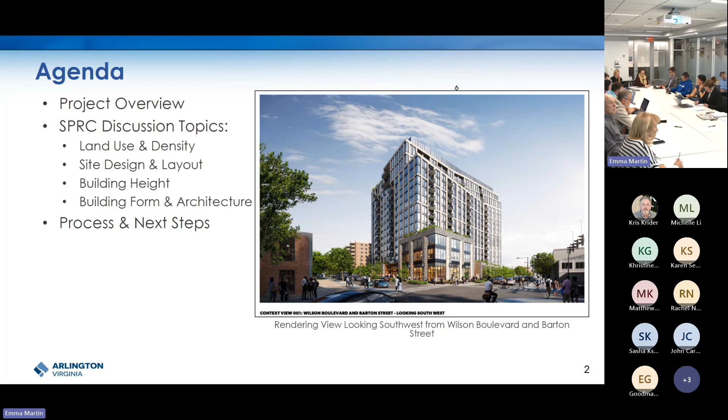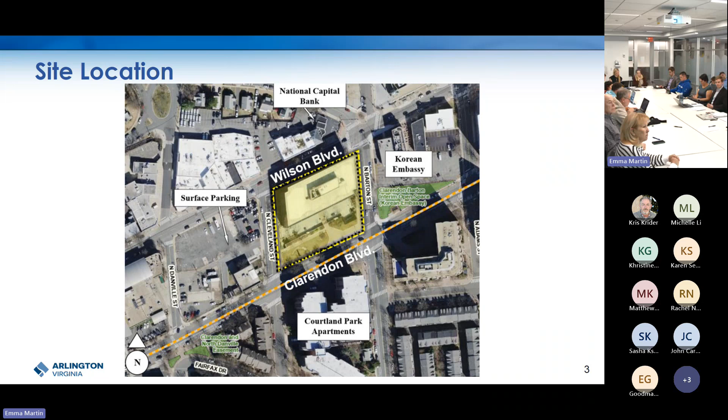The 1.42 acre site is located at 2500 Wilson Boulevard in the Clarendon Courthouse neighborhood. For context, in 1984, site plan number 220 was approved for a 5-story office building with ground floor commercial retail space, which is the building that exists today. The site is bordered by Wilson Boulevard to the north, North Barton Street to the east, Clarendon Boulevard to the south, and North Cleveland Street to the west. To the north, commercial uses are located along Wilson Boulevard, and single-family residential uses are behind in the Lyon Village neighborhood. The existing zoning is CO 1.5 mixed use with a low office apartment hotel GLUP designation.

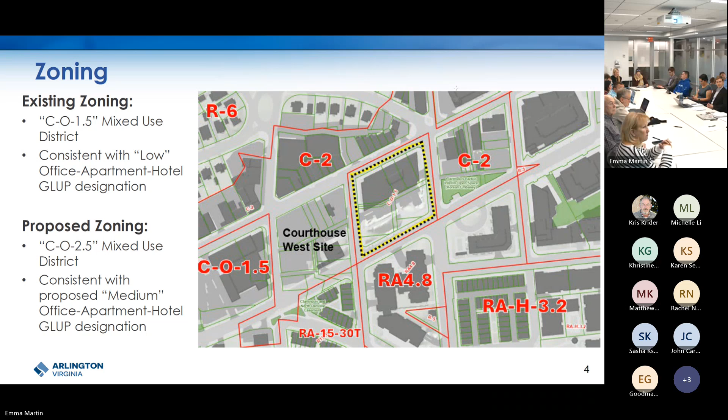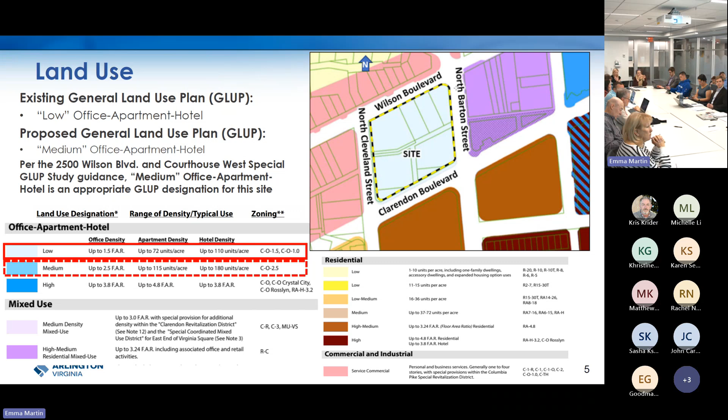The applicant is seeking a rezoning to the CO 2.5 mixed use zoning district. The site is currently designated low office apartment hotel. Concurrent with this major site plan amendment, the applicant is requesting a GLUP amendment to change the site to medium office apartment hotel, which would support the requested zoning district of CO 2.5. Per the applicable GLUP guidance for the site, medium office apartment hotel could be an appropriate GLUP designation for this site.

While there's little specific guidance in the Courthouse Sector Plan for this site, the Courthouse Sector Plan addendum calls for higher density commercial residential mixed use for this area, but does not specify a particular GLUP or zoning designation. On the subject site, the addendum's urban design analysis identifies a sculpture or other feature, and the sector plan's concept plan identifies open space, plaza, and enhanced landscaping on the southern portion of the site.

General guidance in the illustrative plan and design guidelines chapter of the Courthouse Sector Plan includes creating sensitive transitions, breaking up the building mass using setbacks and variable roof heights, differentiating between the pedestrian ground level and upper floors, and supporting the pedestrian environment, as well as breaking up horizontal facades.

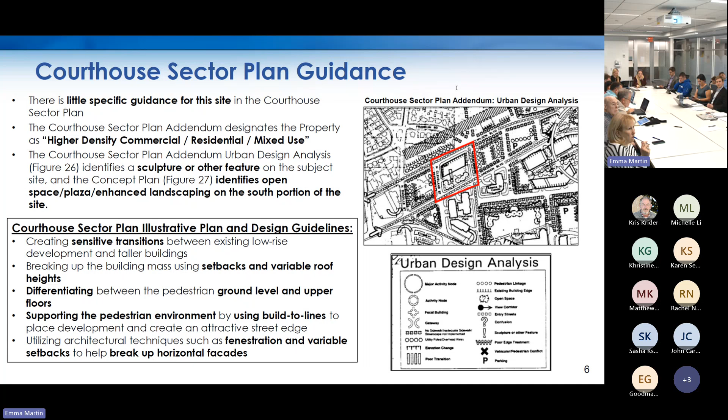In June 2022, TMG 2500 Wilson Boulevard LLC applied for a GLUP amendment to change the GLUP designation from low office apartment hotel to medium office apartment hotel, with an associated rezoning to CO-2.5.

As the site in question has little specific guidance in the Courthouse Sector Plan, staff initiated a special GLUP study, which evaluates the appropriateness of the requested GLUP amendment and provides additional guidance for potential future redevelopment.

For this GLUP study, an interdepartmental staff team initiated a public review process in conjunction with the Long Range Planning Committee of the Planning Commission, which consisted of representatives from the Clarendon Courthouse Civic Association, Lyon Village Civic Association, as well as the Park and Recreation Commission.

Community input gathered throughout the public review process, which included one LRPC meeting, informed the 2500 Wilson special GLUP study document. The study document summarizes staff's analysis and recommendations for potential future redevelopment.

The consensus was that, given the guidance for the site outlined in the recently completed Courthouse West special GLUP study document, there was no need to complete a Tier 2 review, and that the Courthouse West study document can further inform analysis of the 2500 Wilson block.

In May 2023, the 2500 Wilson GLUP study was accepted by the County Board, along with the adoption of an RTA to future public hearings to consider a GLUP amendment from low to medium office apartment hotel.

The 2500 Wilson special GLUP study document summarizes staff's analysis and outlines recommendations for building design, including guidance on setbacks, height, and tapering based on the Courthouse West special GLUP study guidance.

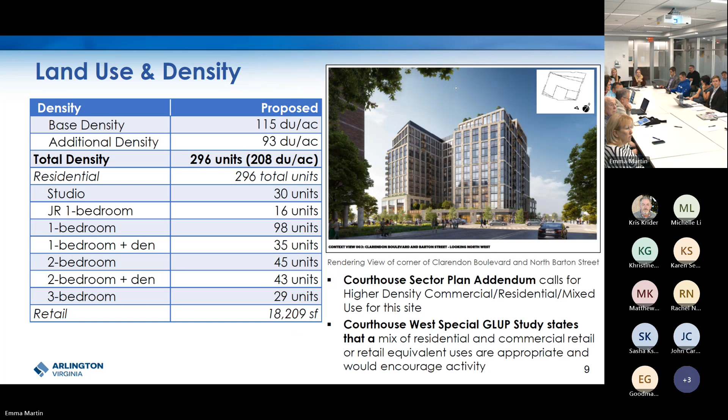In terms of site design and layout, the mixed-use building is 14 stories with ground floor residential and retail, which is in conformance with the Courthouse West special GLUP study guidance to activate the ground floor.

The retail areas will have entries along Wilson Boulevard and Clarendon Boulevard, while the main residential lobby entrance will front on North Barton Street. Above the one-story podium, the applicant proposes a courtyard and amenities for the building's residents. Additionally, the building is topped with a private rooftop amenity space.

The below-grade parking garage and the location of access to parking off North Cleveland Street is in conformance with the GLUP study's recommendation. For purposes of tonight's discussion, we can talk about the building and open space at a conceptual level in terms of placement and layout.

As the applicant progresses on the design of these spaces, we can go into specifics at the next SPRC meeting, which will cover transportation, public art, and open space.

In conformance with the sector plan and GLUP study guidance, the applicant is proposing approximately 6,700 square feet of open space on the southern portion of the site, which will include pavers, planters, seating, and new trees along the sidewalk.

The applicant's submitted plans do show outdoor dining. However, that's a separate process from this site plan and not a part of this site plan proposal. The applicant is aware that the streetscape and park frontages should be designed to support a variety of uses, not just restaurants.

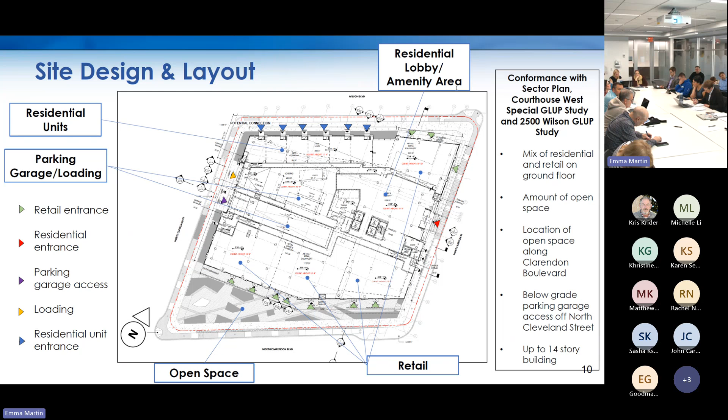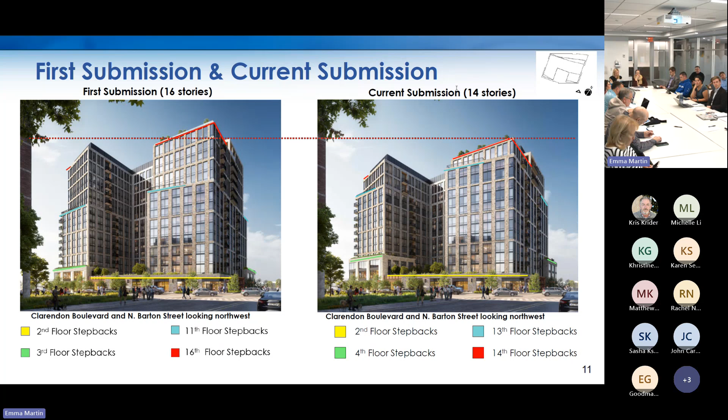The applicant's original request was a 16-story building with over 320 units. On February 19th, the applicant submitted a revised application to change the building height to 14 stories, which conforms with the recommended maximum height outlined in the two applicable GLUP studies guidance.

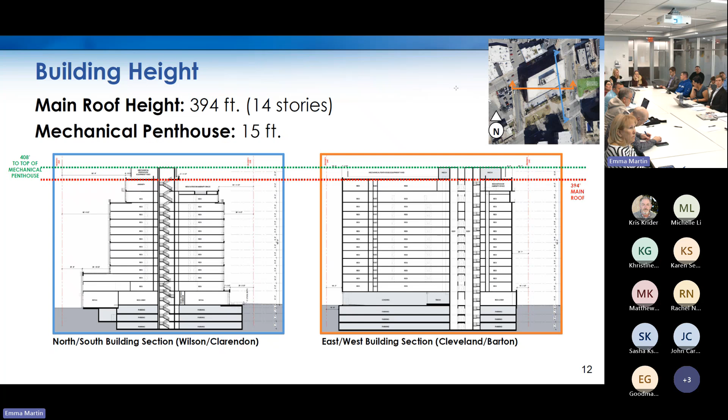The proposed building height from average site elevation is 394 feet and 408 feet, including the 15-foot mechanical penthouse. So the building will have a height of up to 171.5 feet at its highest point from the ground.

Setbacks will vary depending on location, with approximately 4 to 15 feet on Wilson Boulevard, and on Clarendon Boulevard, setbacks range from 22 to 68 feet. The use of variable setbacks on Wilson and Clarendon is in conformance with the GLUP Study and sector plan guidance.

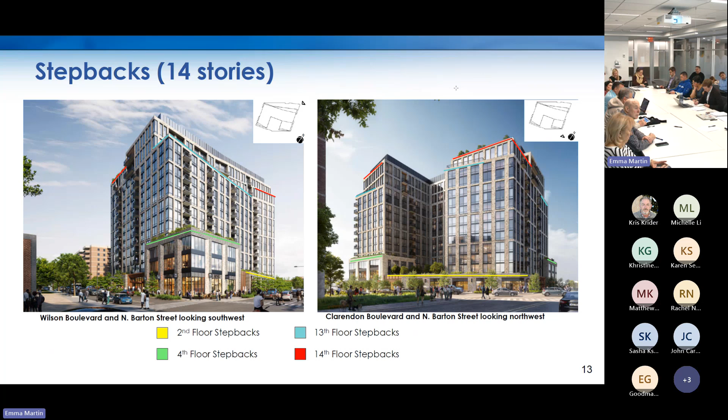The project is generally in conformance with the GLUP Study's guidance in terms of setbacks provided on Wilson, as shown here, on the second, fourth, and 13th floors, and on Clarendon Boulevard on the second, fourth, 13th, and 14th floors, as well as North Barton Street on the second, fourth, and 13th. However, there are no setbacks on the North Cleveland Street frontage and no variable setbacks on North Cleveland or North Barton Street, which deviates from the GLUP's guidance.

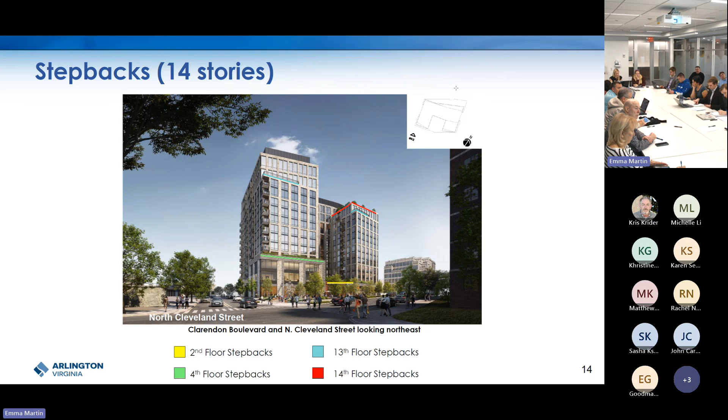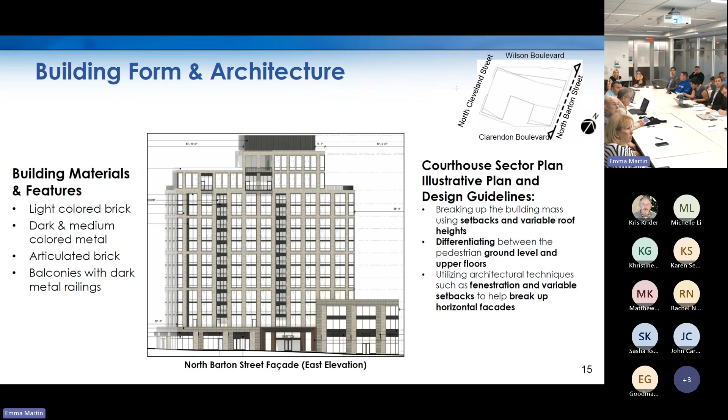Staff will continue to work with the applicant on addressing these deviations. With the exception of North Cleveland Street, the applicant has used setbacks to break up the building's mass, tapered the height down to 2 to 4 stories along Clarendon Boulevard and 2 to 4 stories along Wilson Boulevard, and used changing massing and fenestration to distinguish between a building top, middle, and base, all in conformance with the GLUP Study's and sector plan's guidance.

The proposed building form and architecture is in conformance with many of the recommendations in the Courthouse West Special GLUP Study, including maximum height, breaking up the building facade to generate visual interest, transitioning height down towards the public space, and utilizing multiple stepbacks.

However, the proposed building deviates from the GLUP Study guidance in terms of stepbacks and setbacks on North Cleveland Street, which I'll go more into on the next slide. In addition, use of lightly colored brick on a majority of the facade deviates from the GLUP Study's guidance of using a variety of materials. However, the applicant has used changes in massing and fenestration to distinguish between the top, middle, and base of the building, which is in conformance with the GLUP's recommendation.

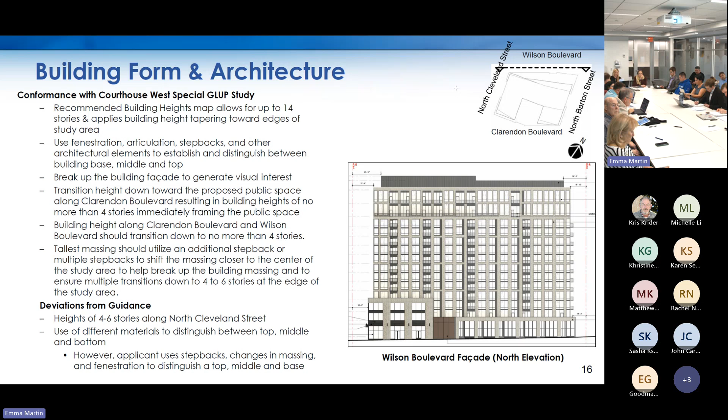This shows the North Cleveland Street frontage. The GLUP guidance states that along North Cleveland Street, building heights of 4 to 6 stories could be appropriate. However, no step back is provided here. The applicant has not provided justification for this deviation, but staff will continue to work with the applicant on this, as right now it is not pedestrian scaled, and the scale is perceived at 14 stories due to the absence of a setback.

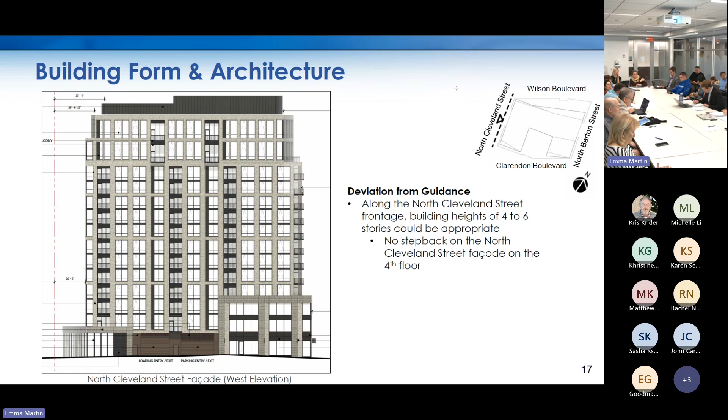This lack of setbacks on North Cleveland Street should not have an impact of shadowing on the open space, however. We'll continue to work with the applicant on that, as well as the treatment of the loading and parking garage doors, which you can see here. We would prefer to see something more transparent in this area.

Staff hosted an online engagement opportunity, which garnered 153 participants and 593 comments. Both staff and the applicant have reviewed these responses, in which many feel the retail and residential uses are appropriate and an improvement over the existing uses. However, some wondered if any existing structure could be retained.

Many expressed strong opposition to the level of increased density at this location, which at the time was 16 stories during online engagement, as they believe it will overwhelm the community and negatively impact the character of the neighborhood and local infrastructure, including streets, existing parking, schools, and sewers.

At the same time, many expressed support for the proposed density of 16 stories, as they feel housing is much needed in this area, and some feel it could accommodate even more density than proposed, due to the close proximity to metro, transit options, and walkability of the area. A summary of these responses has been posted on the webpage and goes more into depth in each topic area.

We also conducted our typical community outreach to relevant groups and promotion methods through the county channels. Tonight's SPRC will be followed by a second SPRC meeting in the coming months, which will cover open space, landscaping, transportation, and parking. The public review process will then move towards commission and county board meetings this summer. This concludes my presentation. Next, we'll have the applicant present briefly.

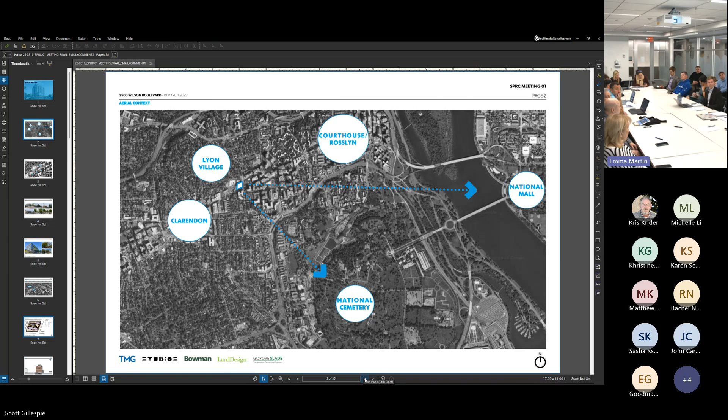So as we know from Emma's presentation that she just gave, this building is located in the courthouse neighborhood of the RB corridor. I'm not going to dwell on the existing conditions, but I think it's relevant for how we thought about the site design, layout, density, and all that good stuff.

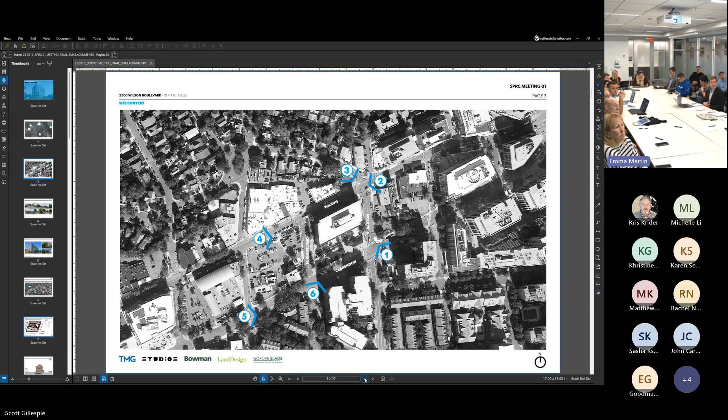The site is currently improved with about a 100,000 square foot office building. We're directly in between both the Clarendon and Courthouse metros. We have some open space that is a key part of our redevelopment proposal that will be a focus in our second SPRC hearing, but is worth noting as we think about the design itself today as well.

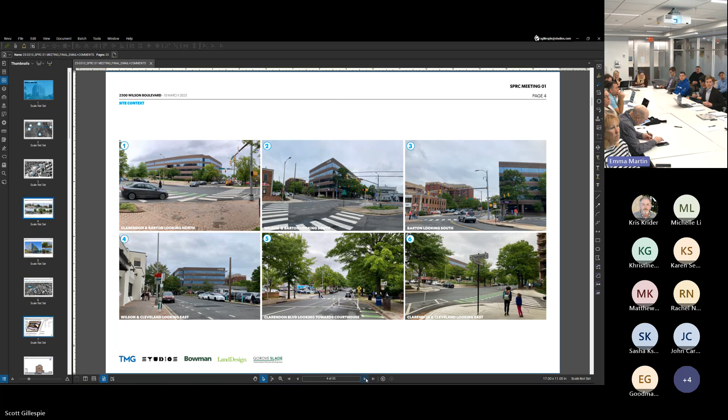As we thought about the proposed design of this development, we spent a lot of time thinking about what exists there today and what opportunities there are for improvement. Specifically, as you go around the building, we have some open space located on Clarendon Boulevard that's currently elevated from the sidewalk. It feels very private, although it is technically publicly accessible—it really just feels like green space for the office tenants. And keep in mind, this is a 50% occupied office building, so there aren't a lot of tenants there to take advantage of that space to begin with. But as we think about what could exist there from a residential standpoint, we wanted to replace and enhance that open space so it can be a true gathering space for the community. That has a direct impact on how we thought about laying out the building and the density that can be located there today.

These are just a few images of the existing conditions as well. I think it's probably more relevant for our second SPRC hearing to talk about public art, but that's something we continue to study actively. We took that away as a key priority, among other things, from our community engagement process—how do we reincorporate the public art in some way into the proposed open space? You'll notice as we go through this presentation that that'll be a part of the thought process.

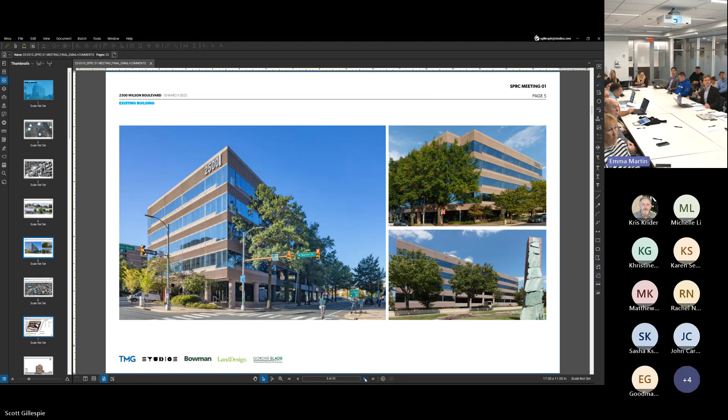One thing that came out of the community engagement process, and this was really a personal goal of mine going into the rezoning: I think it's possible, and even common, in a rezoning or entitlements process for it to feel somewhat adversarial—kind of us versus them, whether it's the applicant and the community or the applicant and the county. I think this has been a collaborative process to date, and it's something we're really excited about. I know we still have a long ways to go in terms of getting to approval, but we're excited about the building we're proposing today.

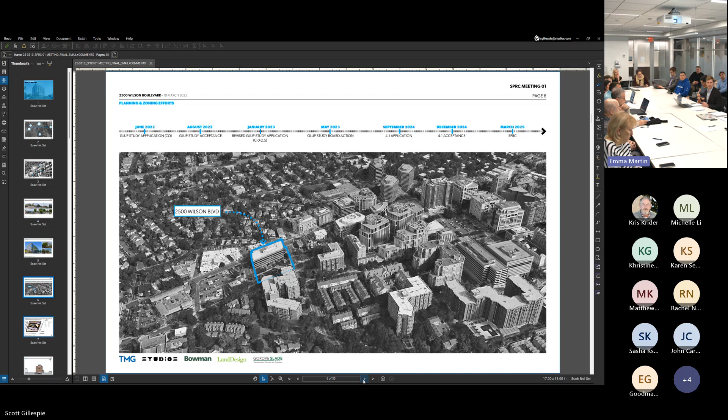We started off thinking about the planning efforts that have happened to date. Specifically, we requested a GLUP study thinking this is the place where density makes sense. We thought about it in terms of the zoning districts where density could be maximized, which guided us towards the CO zoning district. From there, as Emma outlined, we revised our GLUP study application to accommodate the CO-2.5 zoning district, which is limited in terms of density on a units-per-acre constraint. We then submitted a building that was 16 stories in height, the maximum allowed under the CO-2.5 zoning district. I think we heard the county, we heard the community loud and clear that height was a concern here, so we've revised our application to incorporate a 14-story maximum height. That's one of the main benefits of having a collaborative process like this.

So one thing as we thought about the site layout, a comment that came throughout the community engagement process was, can you reincorporate any aspect of the existing office development? The existing office basically covers the northern half of the site.

The below grade, partially below grade parking garage covers the southern half of the site. So we studied it pretty closely, and ultimately we're not able to incorporate any elements of the existing office building.

But what we were able to do was create a building that activates most, if not all, of the 4 sides of this block. It's relatively unique that we have a full block development.

We prioritized retail along the open space because we think of those uses as complementary. The last thing we want, and I think the county and the community would agree, is to deliver a bunch of open space and have it sit vacant. So the fact that we've located that along the open space along Clarendon Boulevard, we think is a use that will complement each other. We've also activated North Barton Street by locating our residential entry off of that street.

We have corner retail located along Wilson and Barton, as well as some ground floor residential units on Wilson Boulevard that we believe serve as a retail equivalent and will activate the street in a way that otherwise might not happen.

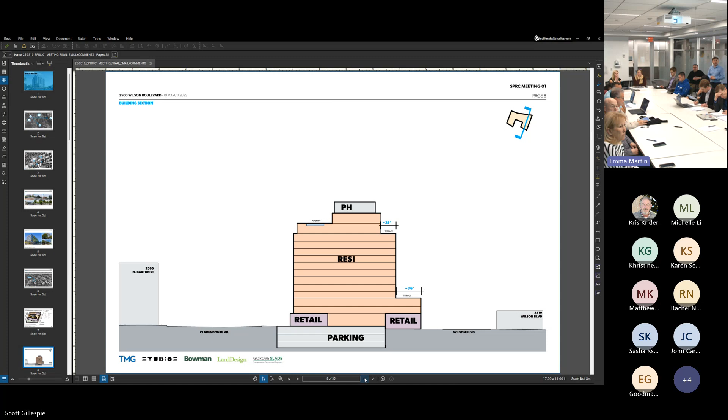If you go to the next one, Scott. So as we looked at massing and starting with a donut on the site in this kind of interesting parallelogram that is the corridor between Wilson and Clarendon Boulevard, knowing that we really wanted to incorporate an open space to the south, that first carving for open space removed a portion of that available mass. Then we really wanted to prioritize opening up the view as you're traveling up Wilson Boulevard.

The other advantage of that, as we started pushing and terracing the building back in that zone, is that we were pulling the building mass away from where it cast shadows on Lyon Village. If you look at how the roads kind of curve up to the north, we were playing constantly with pulling the building such that our shadows at seasons, even in the winter, weren't going to get any shadows into a backyard at 16 stories, and now are pulled back into the street for 14 stories.

And then that final piece, after we've kind of twisted that mass, is really looking at stepping up to create a variation in elevation and scale of pedestrian frontage. So if we go to the next slide, you start to see how those moves kind of start to reflect in a building architecture that looks somewhat remarkable for the corridor, but is actually just responding to these key elements within the GLUP study.

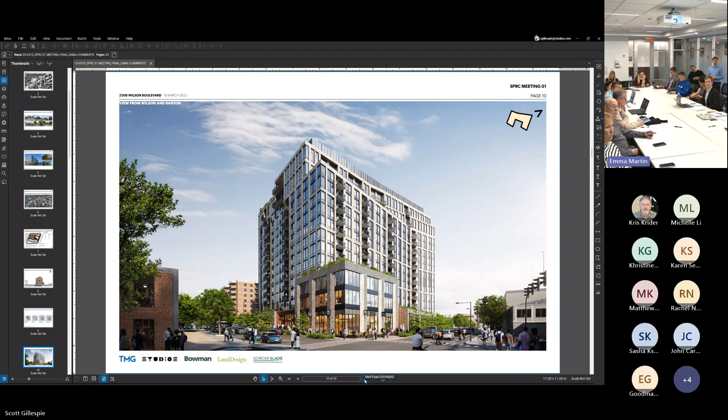So the next slide zooms in on the corner that's in front of us. This slide articulates some of the architectural notions of base, middle, and top. And I know one of the comments on the GLUP recommendations was varying materials, which we'll talk about in a minute, but we've looked to incorporate various articulations of a similar material to be able to have that variety architecturally within a unified vocabulary, but a clear articulation of base, middle, and top with, frankly, a lot of terracing for pretty efficient residential.

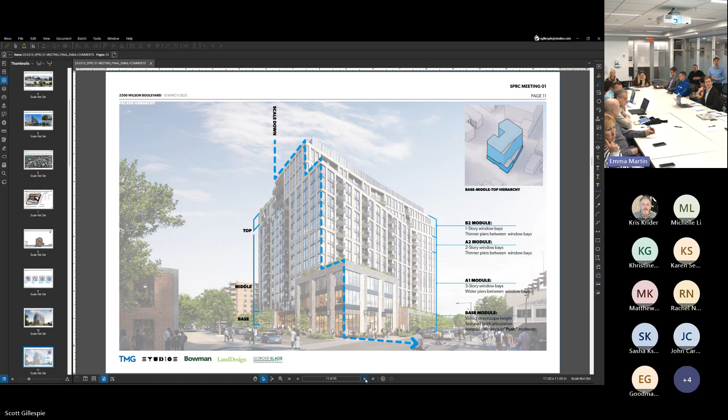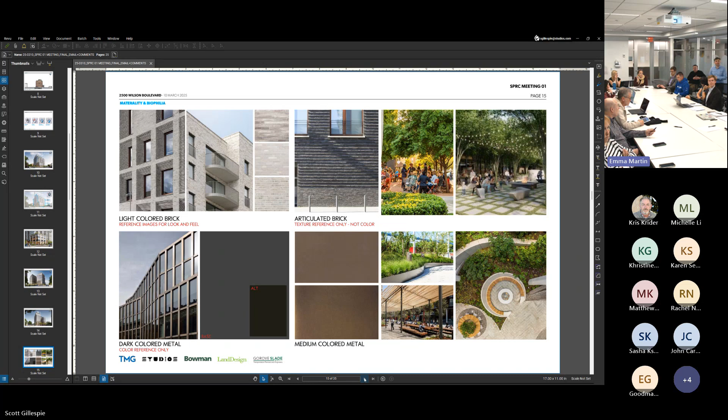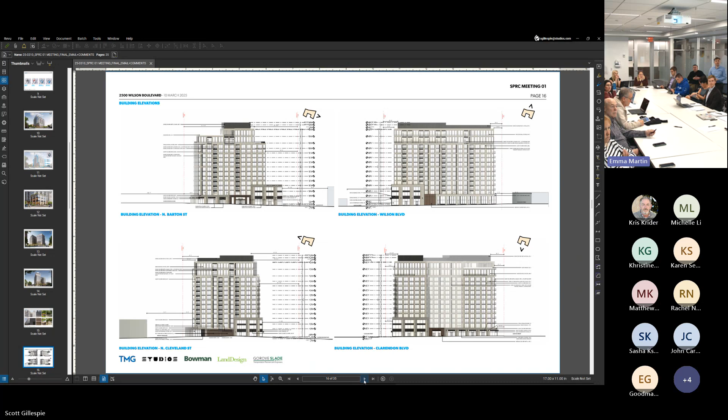It's pretty simple. The next image, I think we're really excited about — sorry, these are the elevations. Just to walk around the building, we have these for reference as we want to talk through. I think the staff presentation did a great job articulating the notions.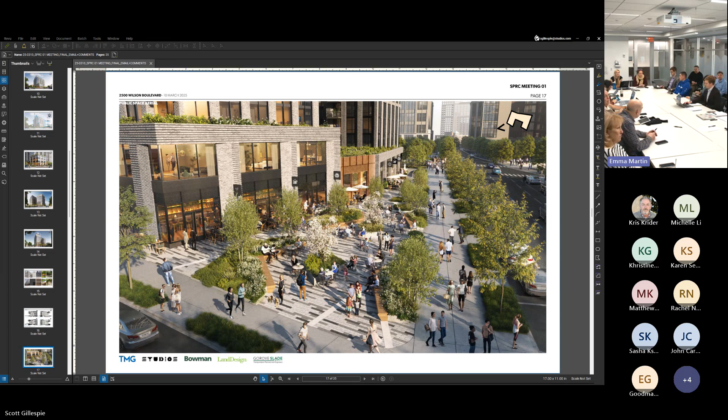So as a reminder, the topics for tonight are land use and density, site design and layout, building height, building form and architecture. Where I want to start is with clarifying questions first. Those would be things like, was that 3 stories or 4? Or, as we just saw in that rendering, shouldn't that be 3 stories, not 2? That would be a clarifying question, so good job.

Anyone with clarifying questions before we go into the first topic? That third story, are you planning on having it retail, or what are you thinking? I noticed that you increased it from 2 to 3 stories.

The third and fourth stories, or anything above the first story, will be residential. So even though it's part of the section that's jutting out, it would be residential facing the street. That's correct.

Clarifying question on the clarifying question: does residential necessarily mean a living unit, or could that be amenity space for residents? It could be amenity space. The only second level amenity space is located along Wilson Boulevard. So I think the space you're referring to is residential. Correct.

Yes, clarifying question. Could you describe a bit more the current parking garage, and what you plan to do to remove it, fill it, and adapt it to the layout you'd like to create? Scott, would you mind sharing a picture of what's under there in the final scenario?

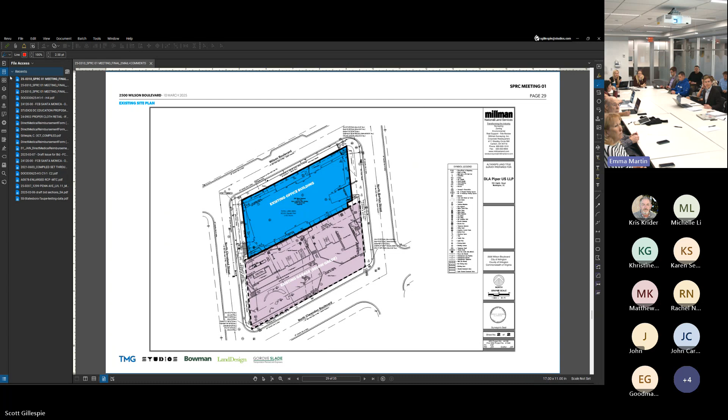Scott, it might be helpful now to flip to one of our parking levels or the ground floor plan of our proposed design. While he does that, the thought behind what we did here was we first studied whether we could reuse any amount of the existing parking garage. Because of where it's located on the site, we really weren't able to do that. We may save some excavation, to your point, but there isn't necessarily an opportunity to reuse the existing parking garage given the layout we've proposed, which for the dimensions of the site is very efficient.

So the portion between the building and the perimeter is going to be filled in, with open space created above it. The rest of my questions about that I'll save for the next session. Okay, thank you.

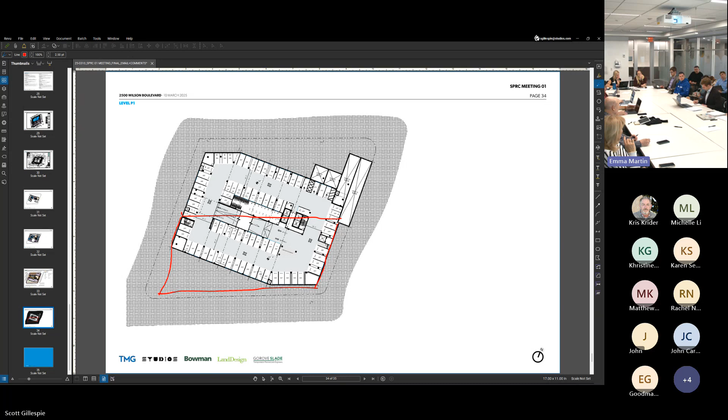Yes, clarifying question. The terrace on Wilson, is that going to be an amenity space, a social place, a green terrace, gardens? It looks like there's a lot of biophilia there. Sure, yeah, along Wilson Boulevard it's mainly green roof, non-occupiable space. There are some units that will have access to small private terraces, but there isn't public space or community space in that area.

Will the private terraces be part of that visible terrace? You wouldn't actually be able to see them from the road. Got it, okay, they're more or less balcony sized.

Now, on the Cleveland Street side, there is a U shape, and you have two stories of retail at the bottom. What's on top of that, within the U, which is higher above — is that going to be garden areas for the building? Right now it doesn't look like a publicly accessible area; it looks like it's a private area.

Do you mean along Clarendon? Yeah, sorry, I'm confusing streets. Yes. That is a private amenity space for the residents who live in the building. So it's like a pool area or something like that? We envision having the pool on the rooftop space, so this is more of a sitting and gathering area — there may be grills in that location, for example.

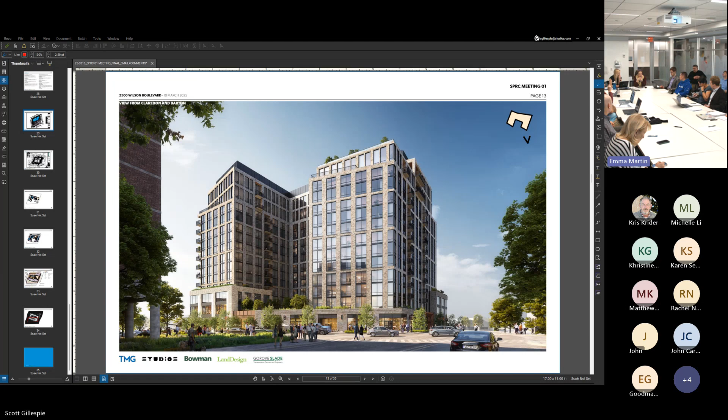So the first part of your question is clarifying. The second part goes into building form and architecture, which is on the agenda tonight. So I don't know if it makes sense to hold both parts to that topic, or... yes, I'm being told it does. Okay, so we will cover that on that agenda item.

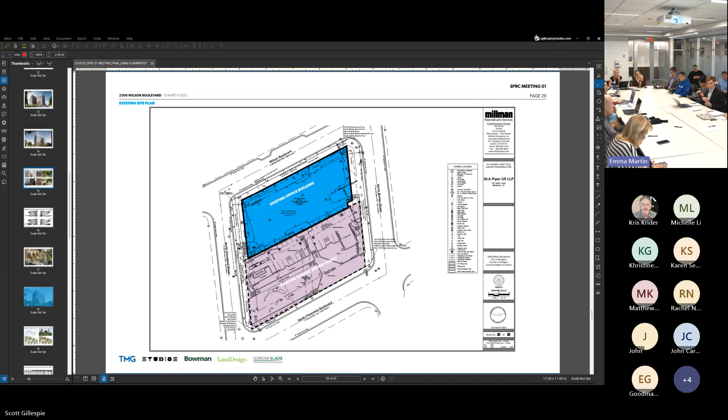Another question is going to be on, I assume the main entrance of the building is going to be on, not the Cleveland side, but on the other side - Barton. Okay, and that's going to be a two-way street, or currently probably is, and I'm thinking about pizza delivery guys. Clearly the Wilson and Clarendon sides are not good places for dropping people off because you're on the left side of the street.

The Metro - have you checked with Metro in terms of how far you can build towards Metro? Because sometimes in the past, Metro has cut back on a building garage after things were approved.

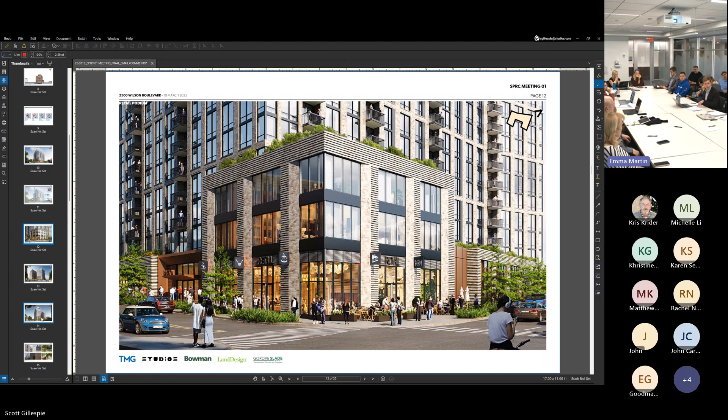Yes, I can answer your first and then second question. For our main residential entry off of Barton, we do have some parallel parking spaces located on Barton as well, but we've specifically reserved 2 pickup and drop-off spaces, either for delivery personnel or Ubers and Lyft rideshare, so they'll be out of the right of way, which we view as a positive. In terms of WMATA coordination, specifically through our geotechnical engineer, we have started to reach out to them. They've seen a preliminary layout of the site, and we'll continue to communicate with them throughout the process.

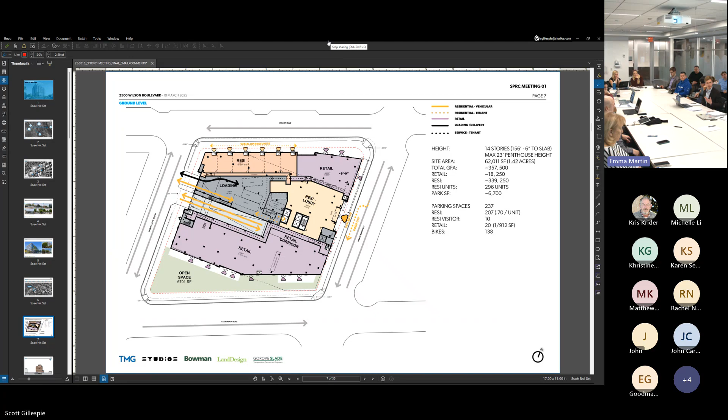Great, just as a reminder, transportation is a topic for the second SPRC. We'll leave it there. I'm going to move us to land use and density. For folks interested in the height change, I think we can talk a bit to the reduced footprint - that's another topic appropriate at this time. Anything on that topic? Otherwise we can go to the next topic. You don't have to have comments on every topic, there's not a prize for that. No, but yes, please - I do always have questions.

So the footprint right now is - I don't know if it fits what you mean by footprint - but right now it's a U shape. And the building across the street from it on the Clarendon Boulevard side is also U shaped. So I was wondering if aesthetically that makes sense, because you're having 2 U's right across from each other. You had pictures of the areas around it, but you didn't have that residential building which kind of mirrors what you're doing on the other side. So that's my first question.

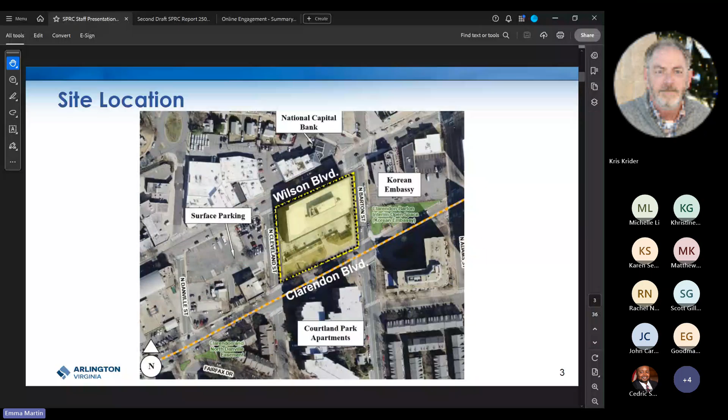Do you mind repeating what the question was? So the U shape, I understand the how comment - is it how is it from an architectural standpoint? So here's an image on the screen of the Courtland Park Apartments, I think. Yeah, what you're talking about.

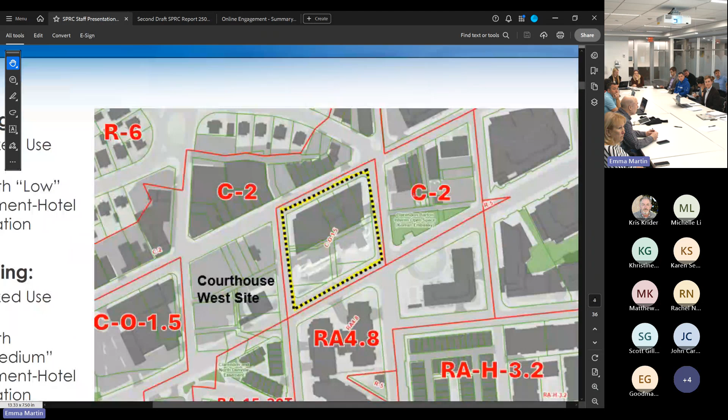I'm sure that Ashton and Dan will have a couple of thoughts here, but a lot of this is based on what we heard in the GLUP study process and what's in the sector plan addendum, particularly the need for open space on the south side. And I'm sure folks who know more about architecture than I do can tell you why that makes sense. But that is a large part of the reason why the building is pushed toward the north part of the site, and then that U is kind of part of it there. I'm sure you'll have better.

Yeah, this is a picture of the building. Yes.

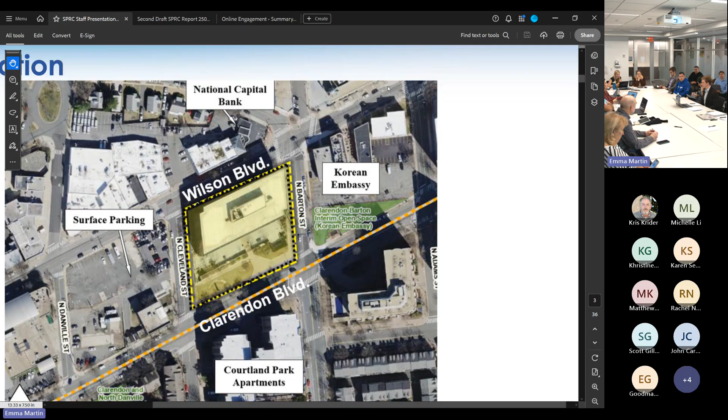Yeah, I think Ted hit on the first one - it's open space. The second thing that comes to mind for me is just the southern exposure. So we had just talked about the level 2 amenity courtyard for those residents. Having southern exposure both for the open space as well as that amenity courtyard was a priority for us. And then the other aspect is really just our ability to comply with both the GLUP study and other guidance for tapering. So we wanted to concentrate density in the middle of the block, and we felt like the U shape was the best way to do that.

Is there any way to use that upper level to make it also a public space? Right now it could have been retail all the way around, right? But right now we have this floor that's kind of closed.

Potentially, it could be an additional public space, since it's a big open public space. That's another opportunity, but I think one of the challenges with that is operational and security - the difficulty of letting folks into the building and moving them around. The county also has pretty strict guidelines when an easement is conveyed; there are very specific qualifications and conditions that have to be met, and it's difficult to impossible to do that on top of a portion of a building.

So I'll go to Commissioner Peters in a moment. I do think that we're, and I'm fine with this, as we're talking land use and density, we're also very much talking site design, and that kind of goes into building form. So if folks want to open up to any of the agenda topics for tonight, I'm open to that. I recognize the topics for tonight all sort of bleed into each other, so I'm not going to be too much of a stickler.

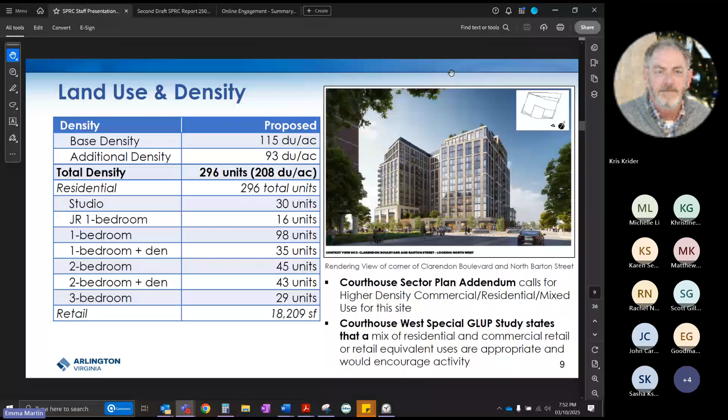I'll go to you in a second - I'm going to ask a question, apologies if I didn't pick up on this before. What is the breakout of unit sizing that you're providing? The base density for CO 2.5 - well no, what is the makeup of units, what's the split between 1s and 2s? There's a slide on this - I have it. A lot of reading, sorry.

No, it's not. I was clearly there. It was a lot to read. We can go into any specifics here, but no, I just wanted to kind of have a sense.

The one thing I'll highlight is that we do have more 2-bedroom plus den and 3-bedroom units than your typical apartment building. Part of that is driven by the unit per acre zoning constraint, and part of it's driven by our market research into demand for larger units in this location. People are renting for longer, whether it's young families, couples, you name it, and we think this is a great opportunity to accommodate that need.

So what is a junior 1-bedroom? A junior 1-bedroom is like a 1-bedroom, but the bedroom is typically not located against the window wall, so it's interior to the unit. It still has a door, so it's not like a studio or efficiency unit.

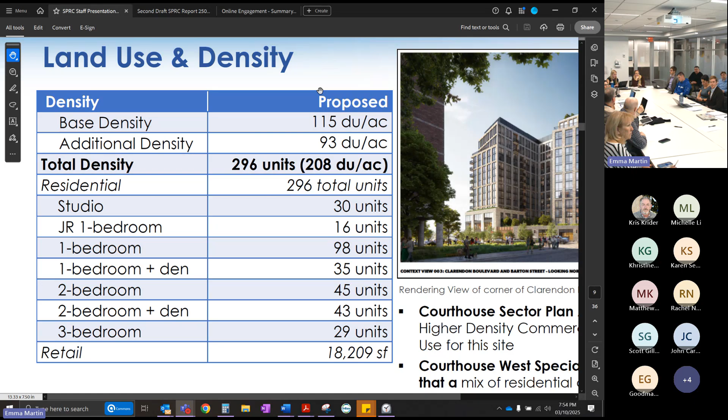Commissioner: I think the land use and density is fine here. I'm sorry we don't have as many units as originally proposed, we can use the housing, but that's okay.

I'd like to see renderings next time on how the Wilson Boulevard residential units that open up on the street look, how they're going to interact with that sidewalk. It's great to have them, don't get me wrong, I'm happy you put them in. I just want to see how they interact with the sidewalk—are they going to be set back a little bit, how high up are the windows, that sort of thing. Some design matters for that sort of thing.

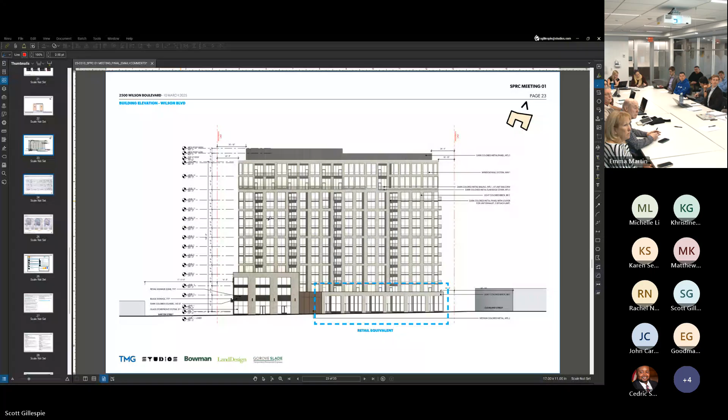Do you mind if I interrupt? Scott, would you be able to share the elevation that we included? It might not be as polished as the rendering, but I think it's useful to look at for the ground floor residential units along Wilson Boulevard. If you can zoom in just a little, that would be great.

One thing we need to be cognizant of as we look at the Wilson Boulevard frontage is a little bit of topography change. So some of these units will have small stoops, but otherwise we're trying to keep them very close to the sidewalk so that it maintains that same level of activation you might otherwise see.

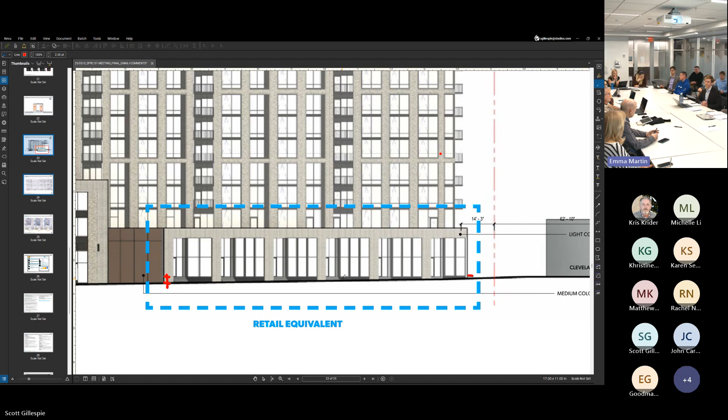I don't have a problem with it. I just want, for privacy purposes—because otherwise there are some Clarendon units that open right out on the sidewalk, and they're really good to have, but because the windows are so big and they're so close, people always keep the shades completely drawn, which defeats the purpose of having eyes on the street because nobody can see through. If there's something that would give people inside more of a feel of privacy, rather than having a window go straight down to the floor, that could help them want to leave it a bit more open rather than always having blinds drawn completely. That's my point on that.

On the materials variation, I actually agree that you don't want too many material variations. There are so many different setbacks and different design here that if you start adding more material variation, it almost becomes visually noisy. I think it's a pretty sophisticated design that doesn't need material variation to look different, because there are a number of ins and outs. I like the pavilion look on both corners—that really breaks up the building. So I'm happy with not having a lot of different materials on this building. That's my aesthetic choice on it.

We will talk about the public art on the next one, because that is something I'm interested in. I also would want to flag how the trees are going to be done on that site on Clarendon, because I want to be careful that as someone is driving or walking along going east on Clarendon, they can actually see the retail there, that it's not completely shielded, because I want that retail to be successful—and to be successful it has to be seen. While I do want that space to be biophilic, I also want people to see it as they're going by and know that there's something there worth stopping at.

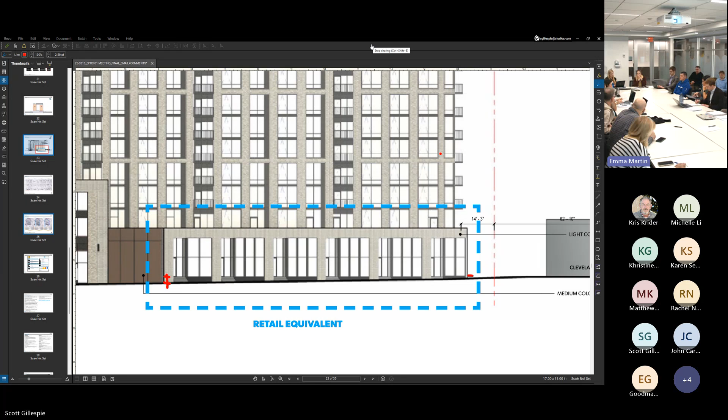I too wanted, first of all, we really want a viable building that is successful. What makes a pedestrian area and retail successful is having humans there. So it was concerning to me when you raised it from 2 stories to 4 stories, because the feel of being in that area now suddenly is much taller, and it's a very different feel than if it was more human scale, which I think is what leads to the success of Clarendon Crossings, for example, because it's very human scale. So I would like to see that more along the plaza area, and that's something to think about.

Also, contrary to Commissioner Latlami, I'm concerned about creating a wind tunnel on Cleveland Street, with the two, and with Courthouse West ending up the same, creating that wind tunnel effect. I think that breaking helped stop the wind. That's a concern there.

The other thing is, right now it looks... and about the tapering, it really helps with preventing that bulk. It's between, ultimately, two residential areas, and at the same time part of the spine to two very busy areas.